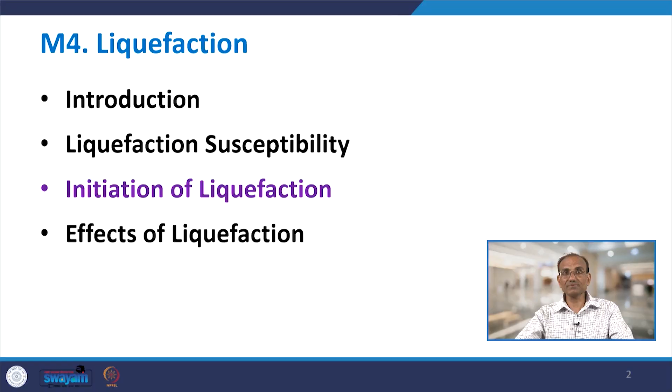As discussed in the last lecture, the topics covered in this chapter include the flow liquefaction surface, FLS, which we discussed in lecture 34. Today, in lecture 35, we are going to discuss the influence of excess pore pressure. When we talk about liquefaction, the pore pressure is the hallmark of liquefaction, and when excess pore pressure increases, we are going to talk about its influence before discussing evaluation of initiation of liquefaction in the next lecture.

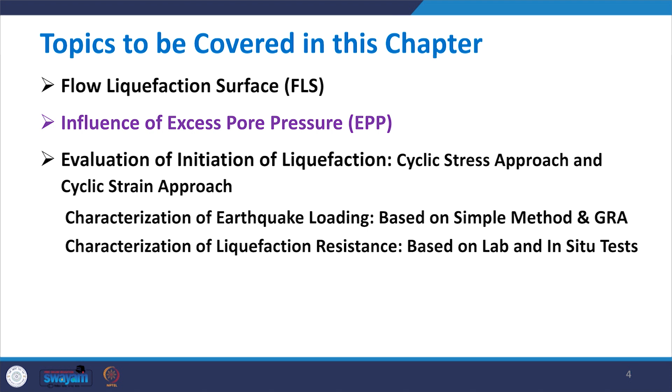So today's topic is influence of excess pore pressure, and we are going to cover this in two parts: one related to flow liquefaction, and another related to cyclic mobility. Most of this part is mostly from Kramer, particularly the figures, and I am going to explain each of the contents as well as the figures, how this takes place and the mechanism.

When we talk about excess pore pressure, the generation of excess pore pressure is the key to the initiation of liquefaction. Without changes in pore pressure, hence changes in effective stress, neither flow liquefaction nor cyclic mobility can occur. So naturally, even if your soil is susceptible to liquefaction, until the pore pressure develops there will be no change in effective stress, and neither flow liquefaction nor cyclic mobility can occur. These different phenomena require different levels of pore pressure to occur.

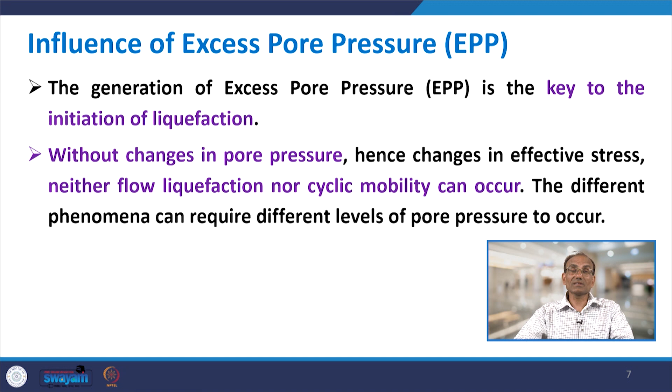Because there are two different phenomena, flow liquefaction and cyclic mobility, the level of pore water pressure generation required for both is different, which we are going to discuss in detail. Flow liquefaction can be initiated by cyclic loading only when the shear stress required for static equilibrium is greater than the steady state shear strength. So this is one of the conditions for flow liquefaction: the stress generated should be more than the shear strength of the soil. I think we have been discussing this point since the beginning of the first lecture on liquefaction.

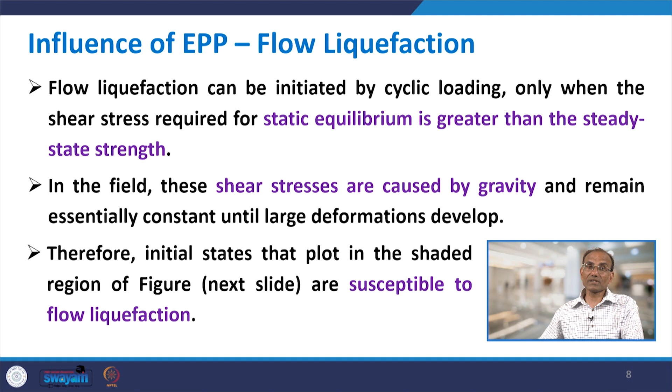In the field, the shear stresses are caused by gravity and remain essentially constant until large deformation develops. Therefore, initial states that plot in the shaded region of the figure are susceptible to flow liquefaction. This shaded region is bounded by the FLS, flow liquefaction surface, which we already discussed in lecture 34. Now suppose your initial soil condition falls anywhere in this shaded region.

If you increase the excess pore pressure due to shaking, what will happen? Due to shaking there will be an increase in pore pressure, which we call excess pore pressure. When EPP increases, P prime will decrease, because effective pressure equals P minus U, and as U increases, P prime decreases. So the point starts moving, and when I move from any point toward this side, I am going to hit the FLS line. Once it hits the FLS, something happens, which we are going to discuss.

So here there is a zone of susceptibility to flow liquefaction. If the initial condition is within the shaded zone, flow liquefaction will occur. If an undrained disturbance brings the effective stress path from the initial condition point to the FLS, described by this line, then once it touches the FLS, flow liquefaction will start. The occurrence of flow liquefaction requires an undrained disturbance strong enough to move the effective stress path from the initial point to the FLS.

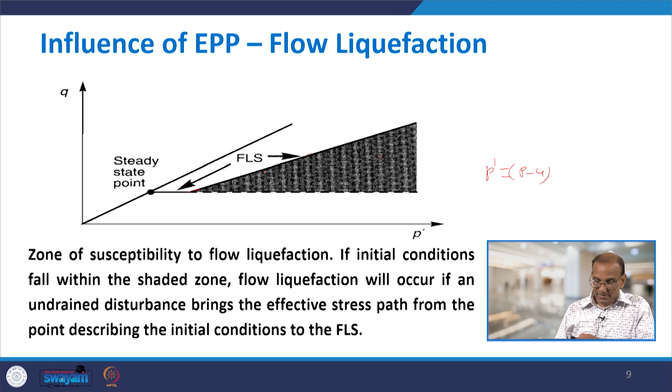If the initial stress conditions plot near the FLS, then under undrained conditions large shear stress can trigger flow liquefaction by small excess pore pressure. So if you are already near this FLS line, for example in this region, then even small excess pore pressure will lead to flow liquefaction.

The liquefaction resistance will be greater if the initial stress conditions are farther from the flow liquefaction surface. So that is the opposite case.

The FLS can be used to estimate the pore pressure ratio at the initiation of flow liquefaction, and excess pore pressure decreases substantially with increasing initial stress ratio for soils at a particular void ratio. So this pore pressure ratio, what is it? We already discussed pore pressure ratio Ru, which is basically U excess divided by sigma 3 effective. So this is the excess pore pressure.

Now when EPP increases, that is this numerator increases, naturally the value of Ru will increase. So this estimates the pore pressure ratio at the initiation of flow liquefaction, and this will decrease substantially with increasing initial stress ratio for soils at a particular void ratio.

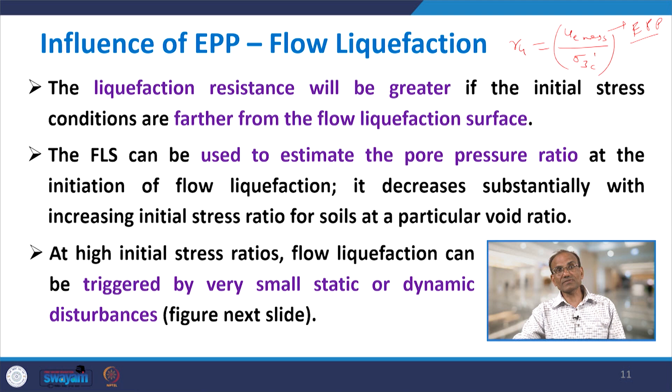At high initial stress ratio, the flow liquefaction will be triggered by very small static or dynamic disturbances, as shown in this slide. So you have the relation between excess pore pressure ratio and the value of principal effective stress ratio. When the principal effective ratio is 1, then Ru is also 1, but when the principal effective ratio decreases, the value of Ru will change.

So this is the variation of pore pressure ratio Ru, required to trigger flow liquefaction in triaxial specimens of Sacramento river fine sand, with initial principal effective stress ratio Kc. The value of Ru required to trigger liquefaction will be high when Kc is small, but when you increase the value of Kc, liquefaction may take place even at a lower value of Ru.

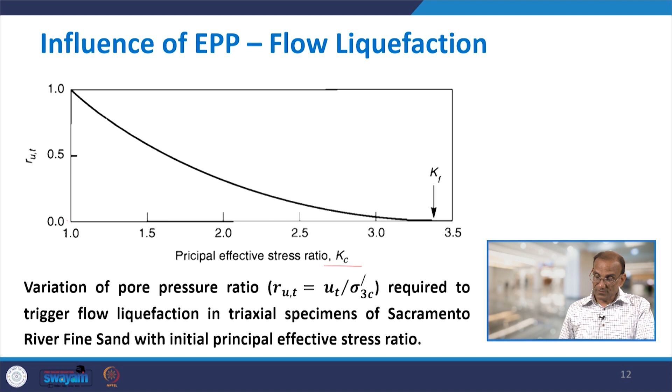So this is the variation required to trigger flow liquefaction. The value of Ru can be read to determine at what value liquefaction will be triggered. Even liquefaction may be triggered when Ru is less than 1, when you have a higher value of principal effective stress ratio.

Although flow liquefaction cannot occur, cyclic mobility can develop when the static shear stress is smaller than the steady state shear strength. So this also we discussed earlier.

In the case of cyclic mobility, where a number of cycles are applied, that means as the number of loading cycles increases, even liquefaction may take place when the shear stress developed is less than the steady state shear strength.

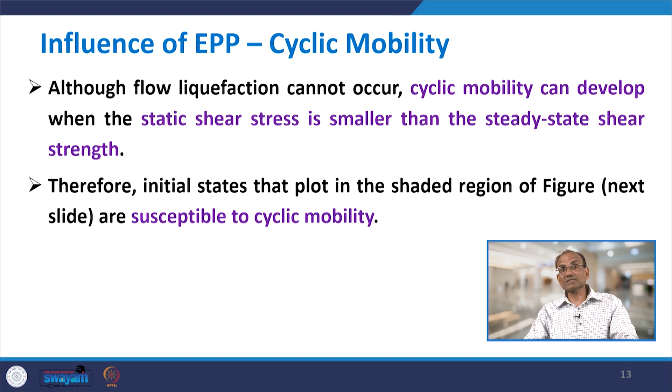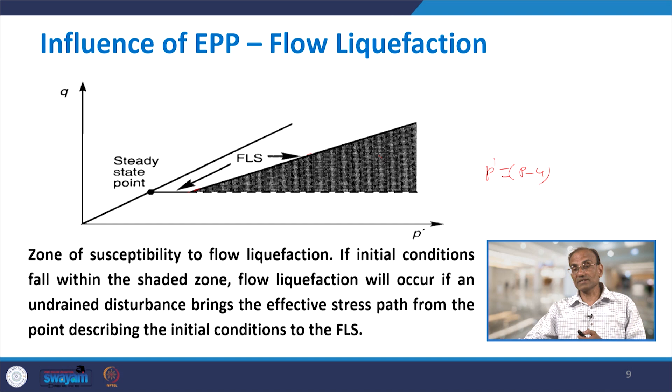Therefore, initial states that plot in the shaded region of the figure are susceptible to cyclic mobility. So for flow liquefaction you should lie in this triangular shaded region, but for cyclic mobility even lying below this triangular region in the shadowed region, cyclic mobility may take place.

That means because your stresses are less than SSU, this is the point where you have steady state shear strength, and your stresses being even below that, still cyclic mobility may take place.

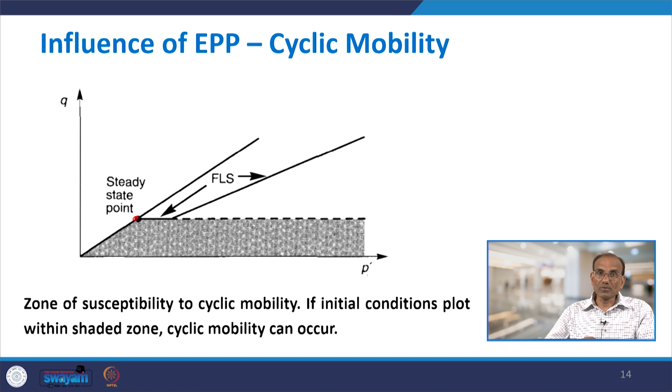So the zone of susceptibility to cyclic mobility: if the initial condition plots within this shaded zone, cyclic mobility can occur. This can occur in both loose as well as dense soils, which we already discussed. It's not necessary - flow liquefaction normally happens only in loose sand or loose soils, but cyclic mobility may take place in both loose and dense soils.

The shaded region of the figure extends from very low to very high effective confining pressure, and corresponds to states that would plot both above and below the SSL.

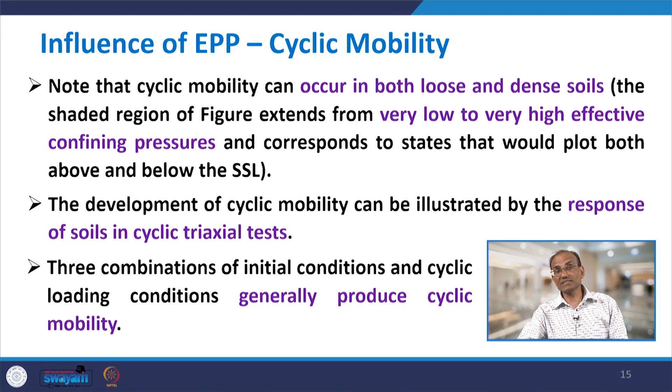The development of cyclic mobility can be illustrated by the response of soils in cyclic triaxial test. When you have the cyclic triaxial test, cyclic mobility can be illustrated. Three combinations of initial conditions and cyclic loading conditions generally produce cyclic mobility, and we are going to discuss these conditions in detail, starting with the first condition illustrated in the figure.

The first condition is when tau static minus tau cyclic is greater than 0, meaning the static shear stress is greater than the cyclic shear stress applied. In that case, no shear stress reversal takes place. Another condition is when tau static plus tau cyclic, the combination of these two, is less than the steady state strength, meaning there is no exceedance of steady state strength.

In this case, the effective stress path moves to the left until it reaches the drained failure envelope. Since it cannot cross the drained failure envelope, additional loading cycles simply cause it to move up and down along the envelope. So this is the case here.

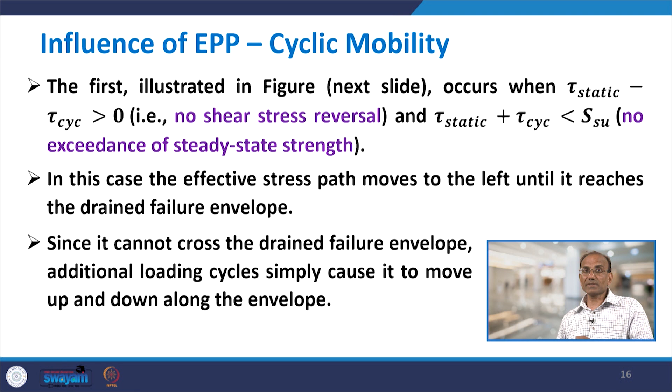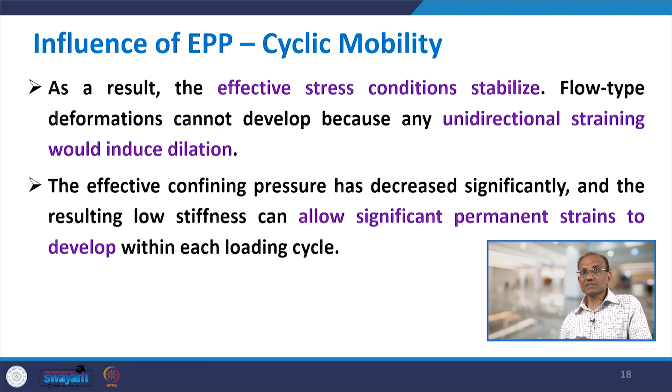As a result, the effective stress conditions stabilize, and flow type deformation cannot develop because any unidirectional straining would induce dilation. The effective confining pressure has decreased significantly, and the resulting low stiffness can allow significant permanent strain to develop within each loading cycle. So this was all for case A.

The second condition belongs to figure B. In this case, it occurs when the difference between tau static and tau cyclic is greater than 0, and still no stress reversal takes place. This is similar to case A, but in this case the sum is greater than SSU.

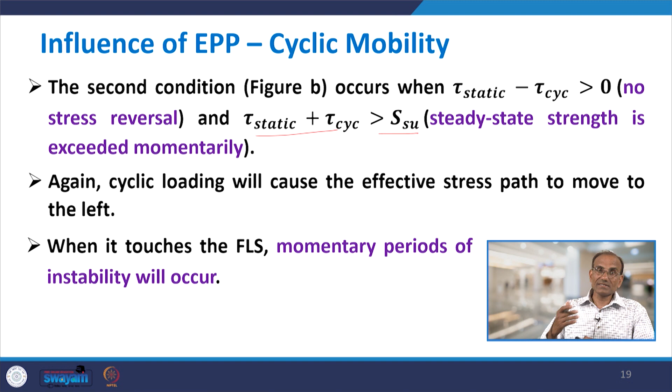Earlier it was less than SSU, but here the steady state strength is exceeded momentarily, and again cyclic loading will cause the effective stress path to move to the left side. When it touches the FLS, momentary periods of instability will occur. Here, because the sum of tau cyclic and tau static is more than this value.

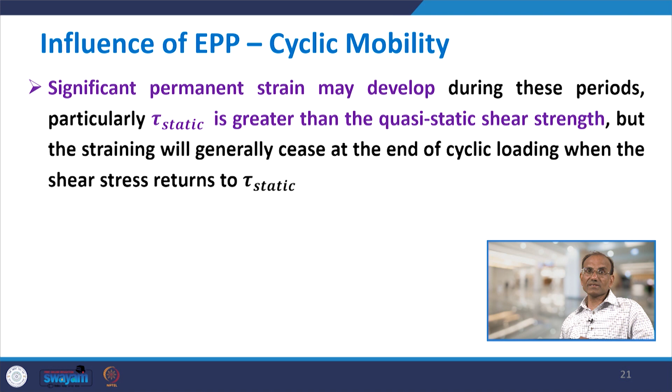Significant permanent strain may develop during these periods, particularly when tau static is greater than the quasi static shear strength, but straining will generally cease at the end of cyclic loading when shear stress returns to tau static. Now coming to the third case, the final condition, in which there is a stress reversal.

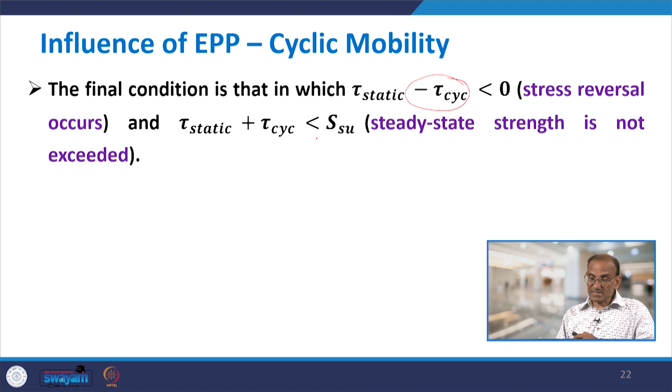That is, the difference between tau static and tau cyclic is less than 0. That means tau cyclic is greater than tau static. So stress reversal will take place, and the sum of these stresses is less than SSU, so the steady state strength is not exceeded. This is the third case.

In the third case, tau cyclic is now greater than tau static, which was not the case between A and B. As a result, when you go to the negative side, there is a stress reversal, it is not positive. All these peaks go to the negative side, that is one difference. On the other side, because the sum of these two is still less than SSU, it will not touch this line. So this is the case here.

So what happens in all these three cases: when excess pore pressure (EPP) increases, then P prime, which is the difference between P minus U (U being excess pore pressure), will decrease because pore pressure is increasing. When it decreases, you move from the right hand side to the left hand side, towards this condition.

In all the cases, when you move towards this, it is not touching this line, but after this point it will start touching here, and then you continue, and finally end up here. So in this third case, figure C, the direction of the shear stress changes, and each cycle includes both compressional and extensional loading.

Experimental evidence has shown that the rate of EPP generation, where EPP is excess pore pressure generation, increases with increasing degree of stress reversal. So the rate of excess pore pressure generation will be higher when there are increasing degrees of stress reversal, and stress reversal is taking place here.

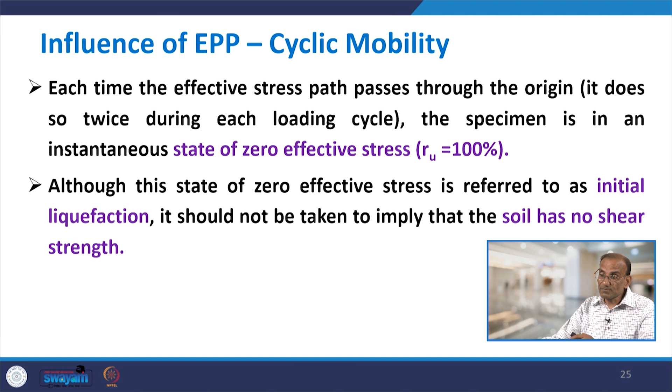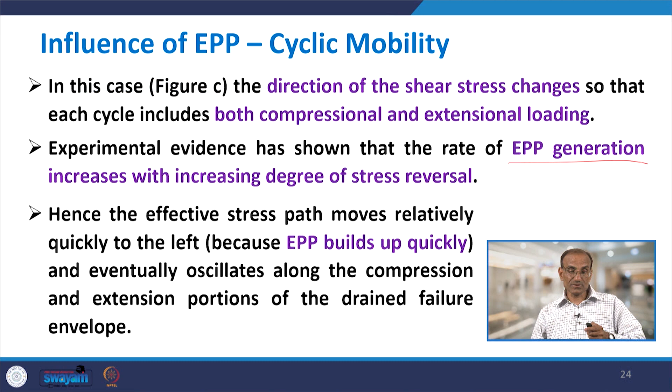This is important: it passes through zero Q two times, but that does not mean the soil has no strength, because it is cyclic loading. One time it is going up and down, it is reversed. So it does not mean that there is no shear strength here.

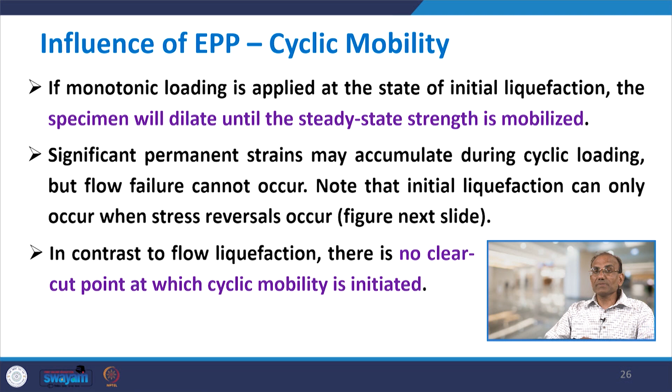If monotonic loading is applied at the state of initial liquefaction, the specimen will dilate until the steady strength is mobilized. Let us see that here. Now, both figures are in different form: one is deviatoric stress versus axial strain, another is Q versus P. Let me discuss the second one first. You apply the cyclic loading with stress reversal, and this goes. When this touches the steady state line, it goes here, and finally it comes here. But when it touches this point, it will follow like this, and then it moves to monotonic loading.

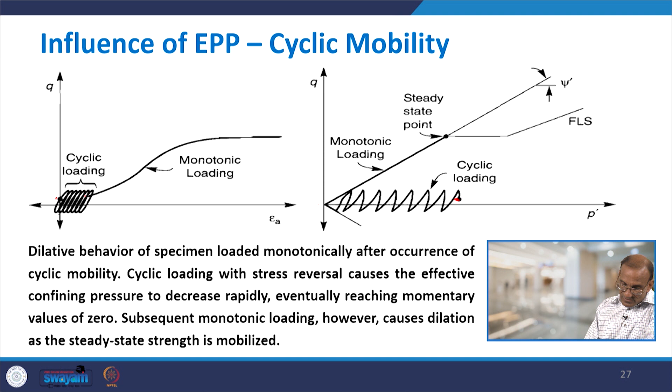So here you have the cyclic loading, and on top of it you have the monotonic loading. In this case the specimen starts from this point and goes towards the left, while in figure A, the cyclic loading point starts from this point and moves towards the right side, and after this monotonic loading starts from this point. So this should be treated as: cyclic loading first, then monotonic loading. The figure shows dilative behavior of the specimen loaded monotonically after occurrence of cyclic mobility. So first cyclic mobility is there, and then after cyclic loading, you have the monotonic loading.

Cyclic loading with stress reversal causes the effective confining pressure to decrease rapidly, eventually reaching momentary values of zero. Subsequent monotonic loading causes dilation as the steady strength is mobilized. So what happens after this monotonic loading? Again it reaches this point, the steady state point. When it reaches the steady state point, dilation will take place. So here, in contrast to flow liquefaction, there is no clear point at which cyclic mobility is initiated. That is the difference - we cannot say this is the point from where cyclic mobility will start.

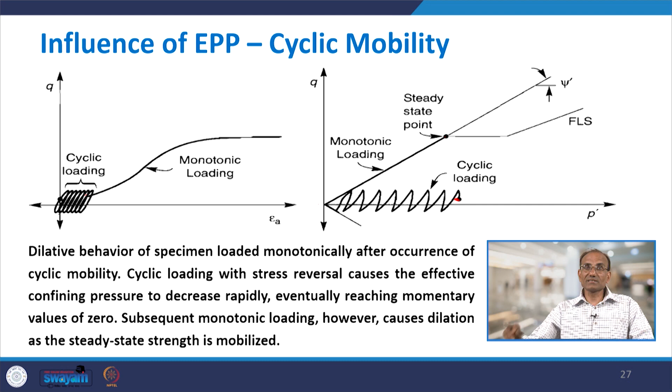Now, continuing with the influence of excess pore pressure, which is related to cyclic mobility: permanent strains and the permanent deformation produced also accumulate incrementally, meaning with time they keep increasing. The magnitude depends on the static shear stress and the duration of the ground motion. For ground motions of short duration on nearly level sites, permanent deformations may be small. For moderately sloping or gently sloping sites subjected to ground motion of long duration, cyclic mobility can produce damaging levels of soil deformations.

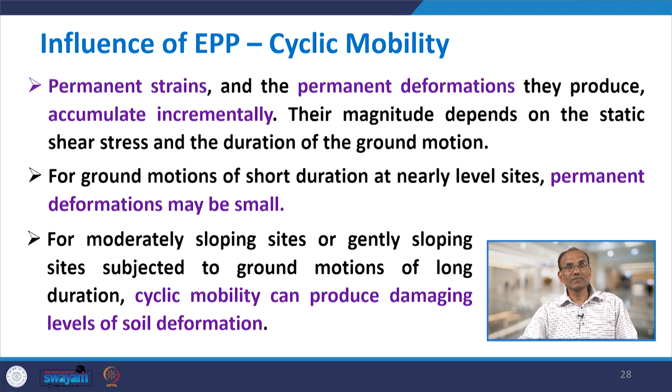So the levels of soil deformation also depend on whether you have a gentle slope or sloping sites. For sloping sites this is dangerous, but for gently sloping or moderate sites, if subjected to long duration ground motion, cyclic mobility will be able to produce damaging levels of soil deformations. So that was all about the influence of excess pore pressure, which we discussed in two parts: one related to flow liquefaction and another related to cyclic mobility.

With this, the first part of initiation of liquefaction is over. In the next lecture we are going to talk about two approaches: the cyclic stress ratio approach and the cyclic strain ratio approach, for determination of liquefaction potential. From that analysis you can determine whether liquefaction will occur at a site or not. I end this lecture here since this topic is over. The next lecture will start another topic related to liquefaction - the cyclic stress approach, which consists of what is popularly known as the Seed and Idriss analysis, where we will discuss how to characterize earthquake loading and how to characterize the liquefaction resistance of soils.